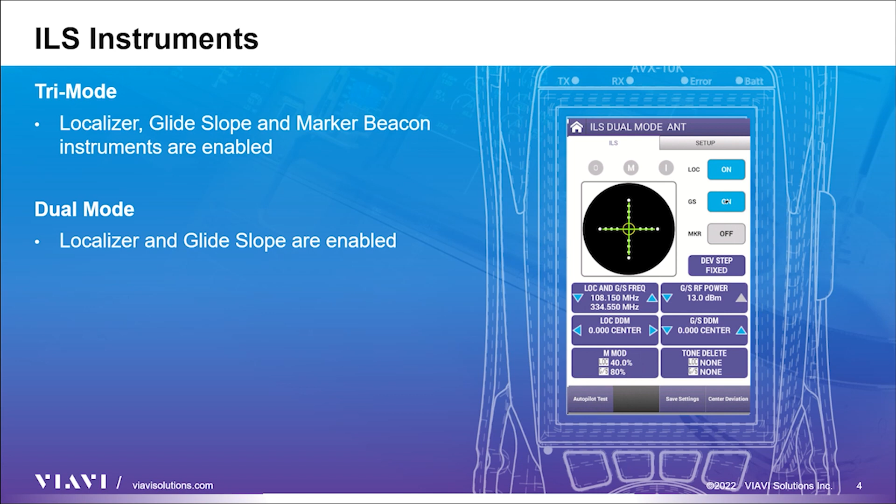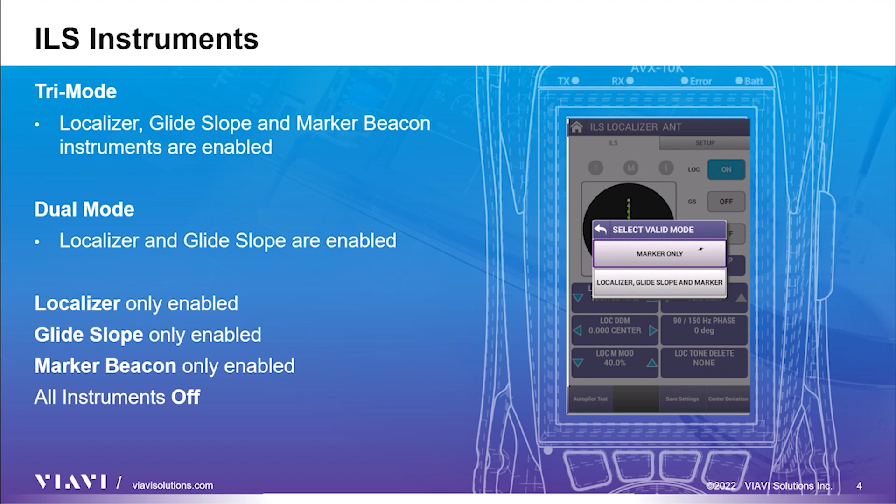And localizer only. Glide slope only. Marker beacon only. And lastly, all instruments off. There may be times when you are enabling instruments, and a pop-up screen appears. This is to help aid in the selection of one of these valid instrument states. Now, let's review all of the setup parameters.

The RF port selection differs slightly from other instruments as it only has options for antenna and direct. There is no coupler testing option for the ILS instrument. RF power units can be set to dBm, or V for volts. The frequency input type can be either preset, channel, or variable.

Preset provides a set of 3 fixed frequencies. Channel allows the selection of any on-channel frequency. VAR allows the selection of frequency in 1 kHz steps. Please note that the variable setting may not apply to every instrument mode. ILS units determines the localizer and glide slope deviation units in either DDM, difference in depth of modulation, or microamps.

External attenuation allows for 0 to 22 dB of compensation for an external attenuator on the RF I/O connector. This is used for extending the power monitor rating and range. If the external attenuator is selected, the value is displayed on all mode screens in the external attenuation field under the RF level field. The Morse code field defines up to 4 characters that are transmitted when Morse is selected under the localizer setting on the main page.

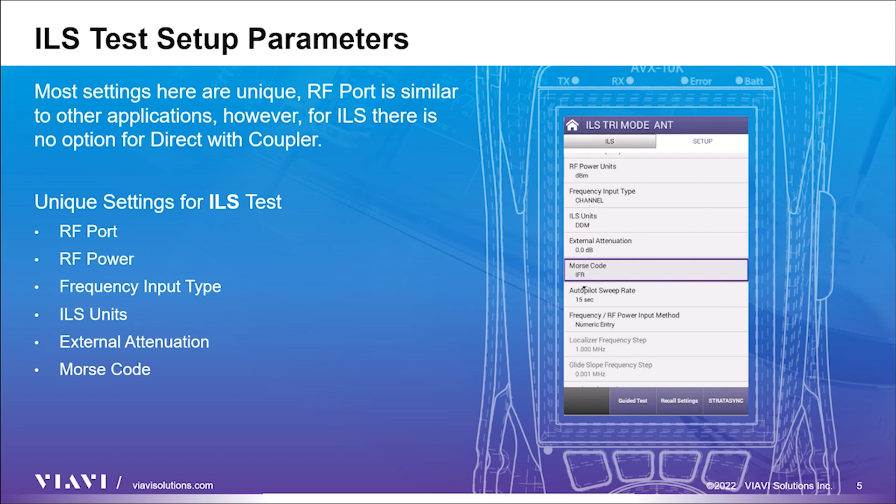Autopilot sweep rate allows the localizer and glide slope DDM sweep rate to be set from 5 to 40 seconds, in 5 second increments. The frequency and RF power input method field determines if power selection inputs will be done with numeric steps or numeric entry. Numeric step allows the frequency and RF power fields on the main screen to be adjusted in step values. Numeric entry allows for any value in the defined range to be entered.

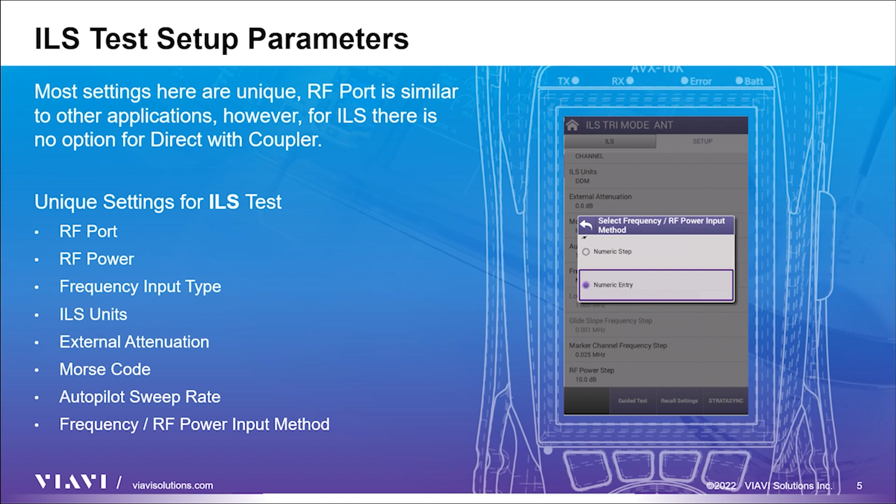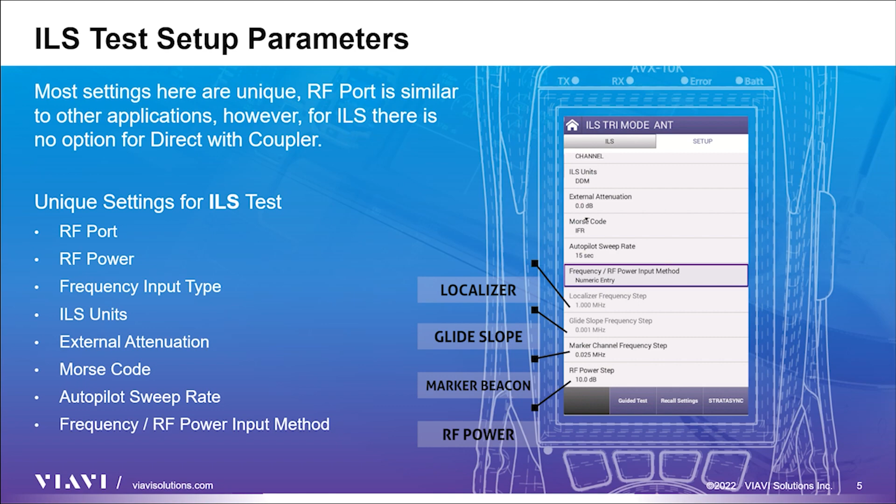When numeric entry is selected, the localizer, glide slope, marker beacon frequency step, and RF power step fields may be automatically enabled or disabled based on the instrument mode. Once you have completed the setup parameters, the next step is to adjust parameters, as needed, on the main page. All of the fields with a blue background can be modified, and localizer, glide slope and marker beacon can be turned off and on. Marker beacon is only available by itself, or in tri-mode, with all instruments turned on.

Dual mode will be reflected in the title bar when just localizer and glide slope are turned on. If just one instrument is turned on, the title bar will reflect that as well, and the RF power can be controlled for just that instrument. Please note that the output is always active and changes in accordance with the settings. Localizer can be set to on, tone, Morse, or off.

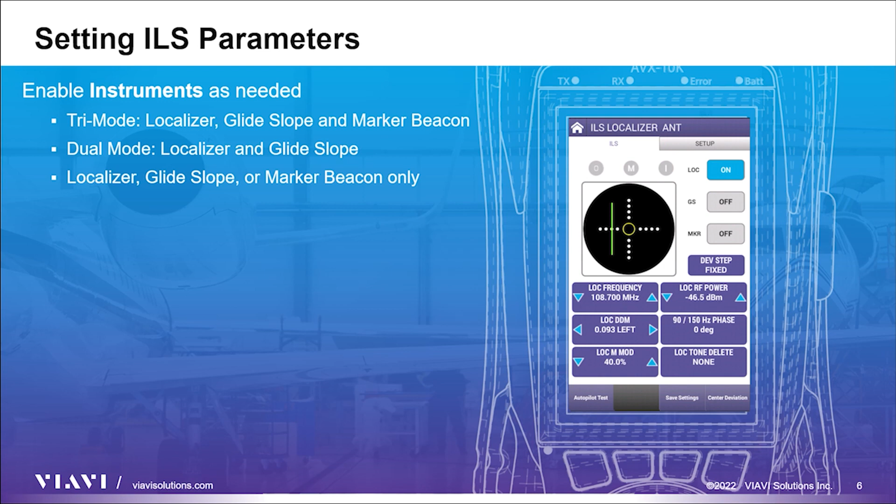Tone will output a continuous tone, and Morse will output the characters defined in setup, and will be sent out every 37 seconds. Glide slope can be toggled on or off, and marker beacon can be set to off, outer, middle, or inner. Clicking on the O, M, I indicators will also control the marker beacon. The title box will change depending on which features you have enabled. For example, with everything turned on, the title will say ILS tri-mode.

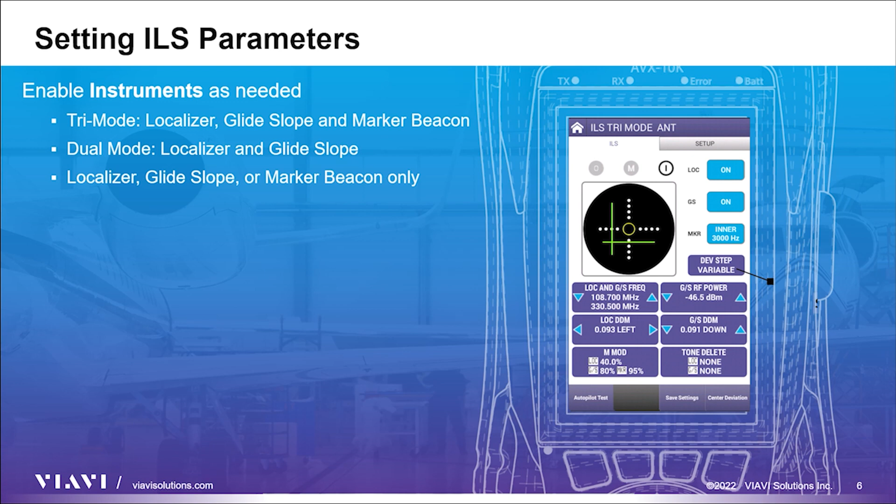The available fields on the main page will also change, based on the enabled features. However, we will focus on controls in ILS tri-mode. The dev step field can be toggled between fixed and variable and will affect both the localizer DDM and glide slope DDM fields. The localizer and glide slope frequency fields can be adjusted. The adjustment values will depend on the frequency input type selected as defined in the setup.

The RF power for the glide slope signal can be controlled as well. This is the case for both dual mode and tri-mode conditions. To control individual instrument power, just that instrument must be enabled. Localizer and glide slope DDM offset can be controlled with the fields and arrow keys, or by clicking on the associated bars in the display. If dev step is set to fixed, the bars will snap to the closest associated value.

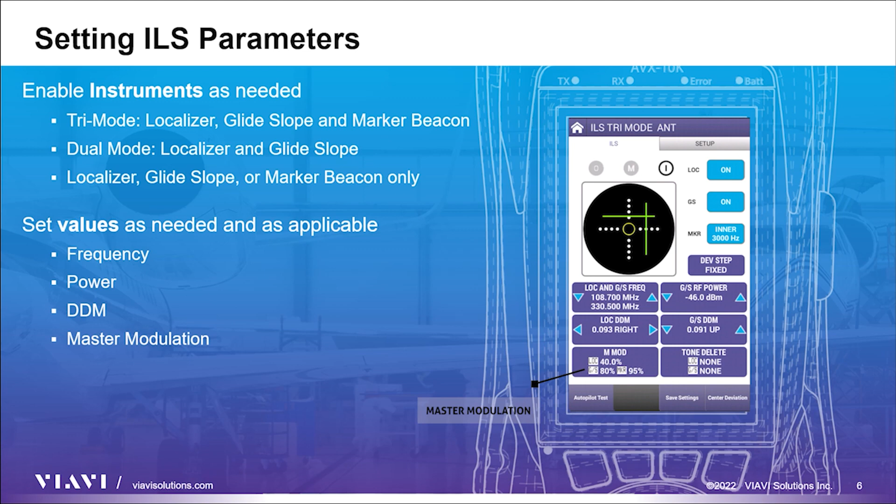The master mod adjustment screen will pop up a screen with sliders for adjustment. The displayed field will vary based on the state of the localizer, glide slope, and marker beacon. The tone delete field allows for the deletion of the 90 Hz tone, the 150 Hz tone, or both. This selection can be for both the localizer tone and the glide slope tone if both are enabled.

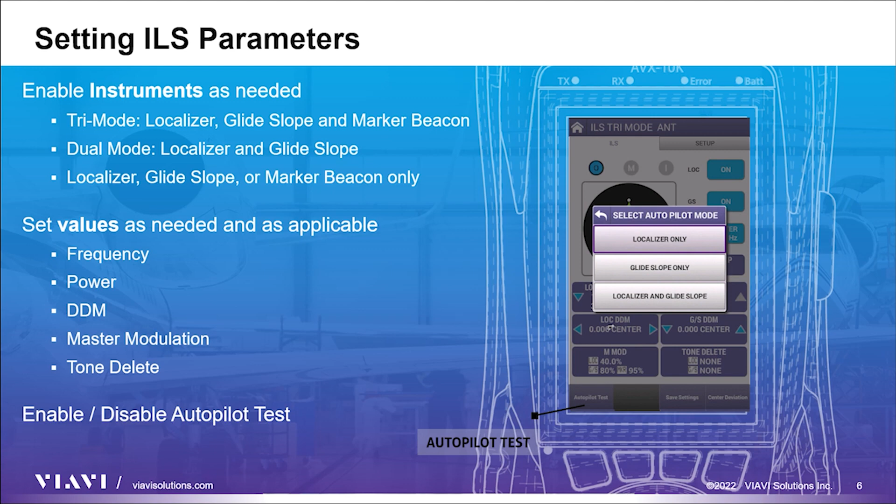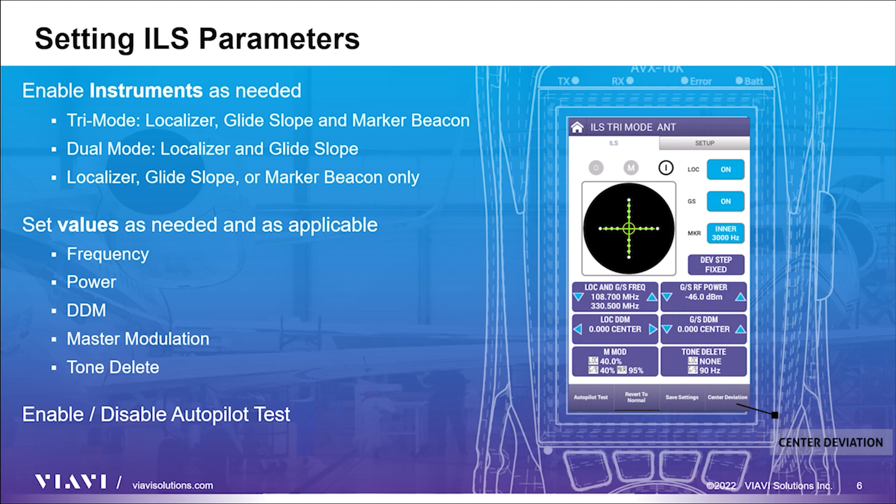The autopilot test will cycle through values of localizer and glide slope offsets and can be controlled by the max deviation controls. The center deviation button will zero any fields that have been modified, moving them back to their normal settings. Here is an example of the ILS test in progress. And now we see the autopilot test running.

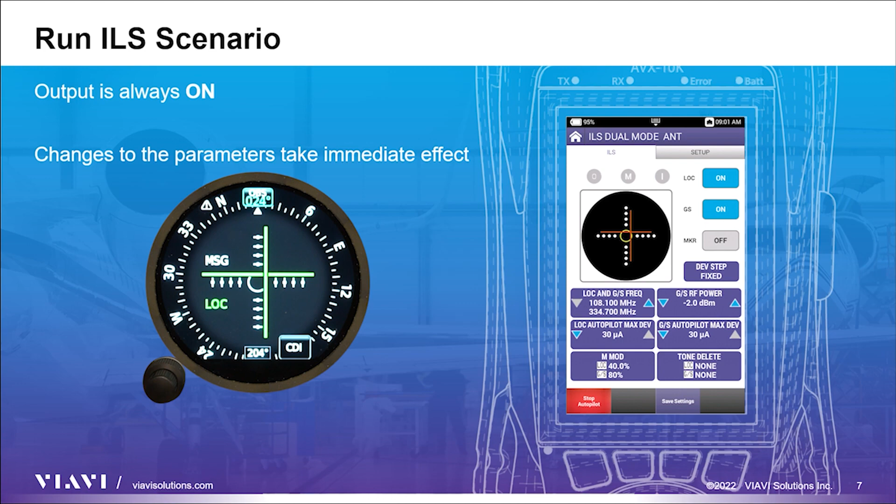ILS settings can be saved by clicking the Save Settings button at the bottom of the screen. Once pressed, users can enter a settings name, job ID, and when used, a work order ID. Settings can be recalled by going to the Settings page and clicking Recall Settings.